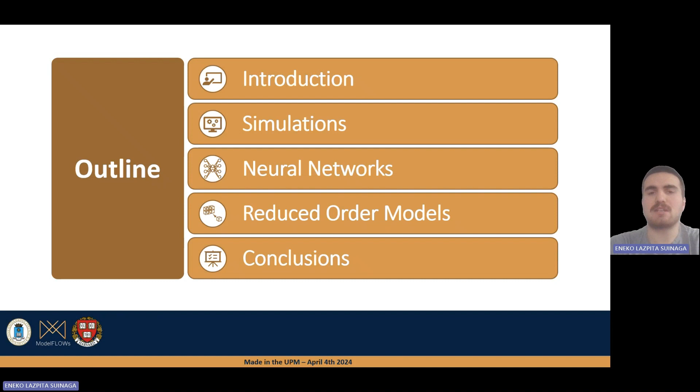So, as I said, I'm Lazpita, a PhD student, and my studies in the research field started in the bachelor's degree in aerospace engineering, where I had some interest in fluid dynamics, computer science, mathematics. So I made a project in the department of mathematics about pattern analysis in urban flows. This was part of a collaboration of the UPM with the KTH and the Universidad Politécnica de Valencia. And from this study, we published a couple of articles.

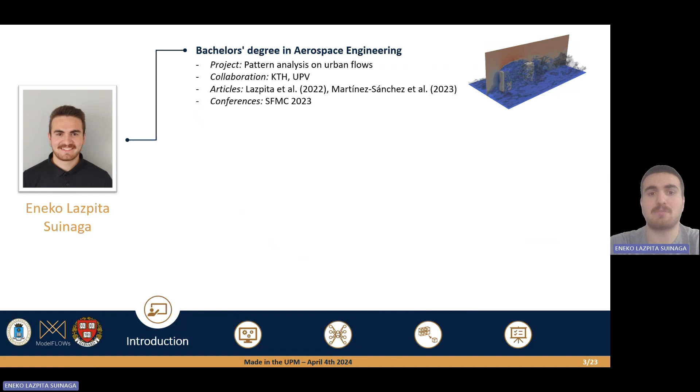Then I did my master's degree in industrial mathematics, pursuing a little bit more this world of modeling flows and other physical phenomena, but also attached to this kind of mathematics or computer science field. And here I did a project of flow control on turbulent channel flow, and both of these topics I've already explained to you in previous videos. We also have published an article about this.

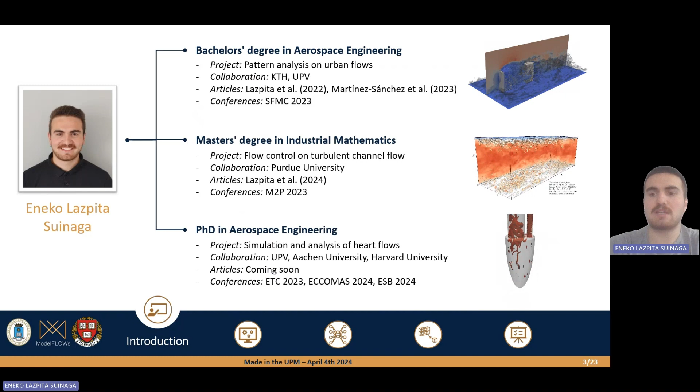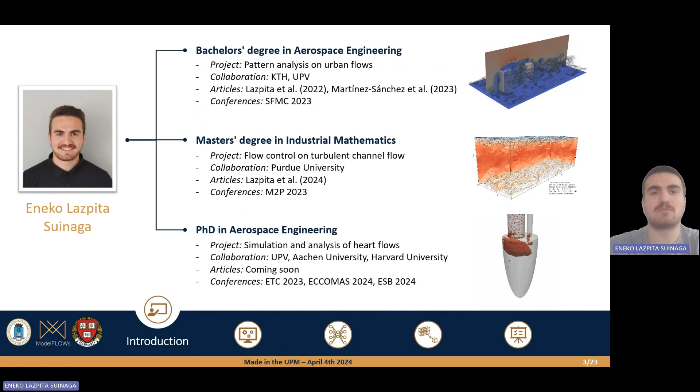And lastly, my PhD thesis, also in aerospace engineering, where I'm basically trying to simulate and analyze heart flow dynamics through CFD and neural networks. This is being done in collaboration with the UPV, the Aachen University, and also now Harvard University as part of my stay. We are also writing a couple of articles about this work.

So before going deeper, as this presentation was part of a public presentation, I wanted to first give some key ideas about what are the databases I want to extract and why an aerospace engineer is working with cardiac flows, with cardiology. Basically, a fluid can be something liquid or something gas. So it can be air, water, or in the case of this study, blood. Also, these fluids can be modeled using the Navier-Stokes equations, and with this we can extract the mechanics of these fluids.

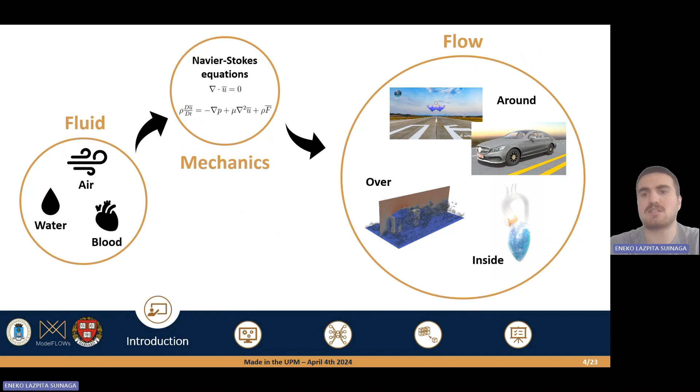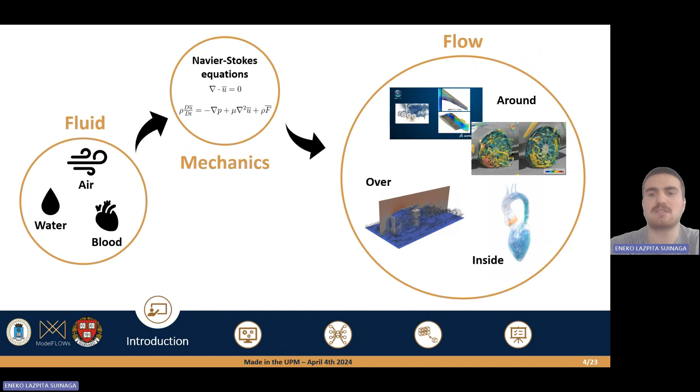This way we can model and obtain the flow over something, such as the urban flows, around something such as cars, airplanes, wings, etc. Or what we are interested in the current study, inside something such as a pipe flow, or in our case, a cardiac flow inside a heart. So now we know why an aerospace engineer is interested in cardiac flows, since the modeling, the equations, and everything are the same.

Why is it so important to study these cardiac flows? Well, there is a great burden in cardiac diseases, which are the leading cause of death regarding diseases, as you can see here on this graph. And 17.9 million lives were prematurely cut short in 2019 alone due to these cardiovascular diseases.

Right now, the state of the art is to diagnose and treat the aftermath of these cardiovascular events or diseases. It means that once it develops, we can treat it. But what we want to obtain is a tool that can identify these diseases before they even develop, and therefore can give a previous treatment or solution.

So for that, I'm part of a project called the DigitHeart project, which is composed of different people, such as professors, PhD and postdoc students, and also doctors. In this project, we want to create a tool, a software, where we can introduce patient MRI data or echocardiogram data, medical data we obtain from the patients thanks to the doctors, and it can classify it as a healthy or an unhealthy heart.

And in case it's not healthy, tell us which kind of disease it can have, such as diabetes, obesity, myocardial infarction, whatever. Then also how this disease is going to evolve in time, so when will be the outcome time, when will be the cardiac arrest or whatever. And finally, some kind of pattern identification that will help this classification and prediction, and also understand better what's happening inside a healthy heart or a diseased heart.

And well, inside this project is my PhD thesis. The aim of my PhD thesis, my project, is to enforce this kind of neural network that classifies and predicts cardiac diseases using simulation data. So for that, I am following this kind of scheme to obtain good databases in an efficient way.

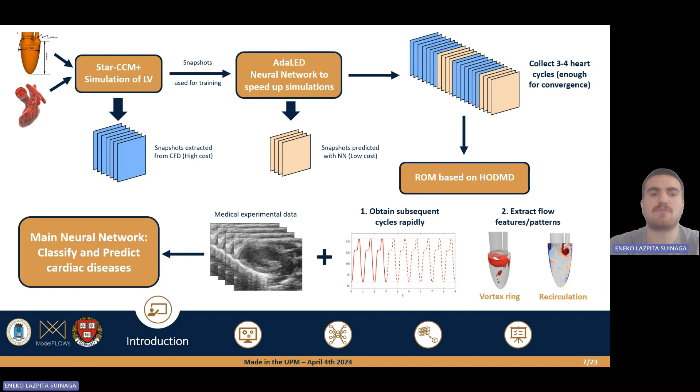So, as I said, the first part of my thesis are the simulations, which I've been performing until now, and I continue working on them. But there are different things to take into account in these flows, since they are really difficult and complex to model. First would be the geometry. We first started using ideal geometries, which are constructed for reference, and we use them for validation, to see how we create these vortices, if our codes are all right compared with literature, etc. And then we can also apply them to patient-specific geometries extracted from medical data we were provided.

The second thing would be the movement of the heart. Of course, you know that the heart is pumping blood, so the heart is moving. First, we tried to use rigid walls. They were not enough; we didn't obtain good vortical structures. So now we're using moving walls where the ventricle walls are moving, as you can see in the video. And finally, for the boundary conditions, such as the inlet and outlet, we can use different kinds of conditions, such as free flow, but the ones we are using right now are fixed, where we specify the inlet velocity and the outlet flow rate using medical data.

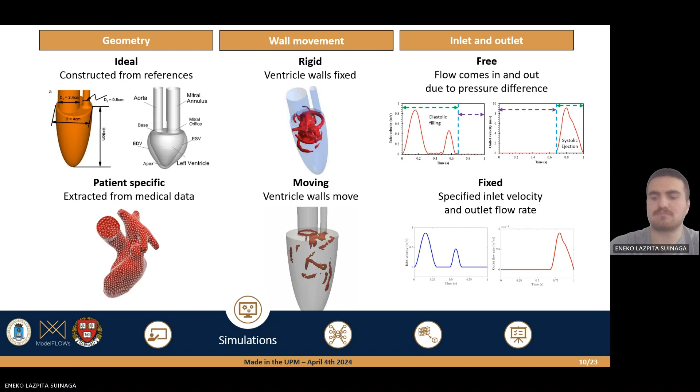So the results of these simulations are the ones you can see on the screen. Starting from the left, we see the Q-criterion, which can catch vortical structures. And what you can see in the video is the first formation of the ring, then the tilting, and the creation of the second smaller ring when we are in the second part of the diastole, which is the A wave, and finally the outflow.

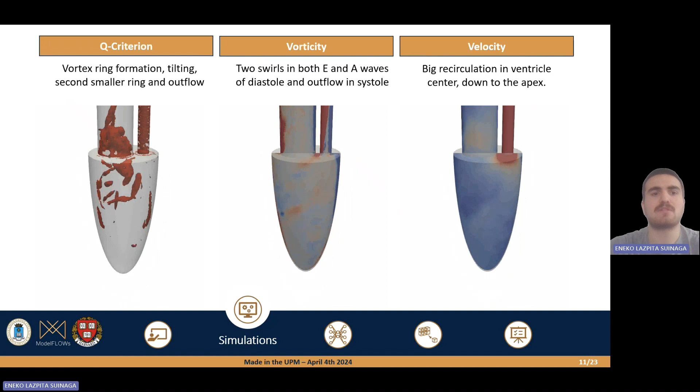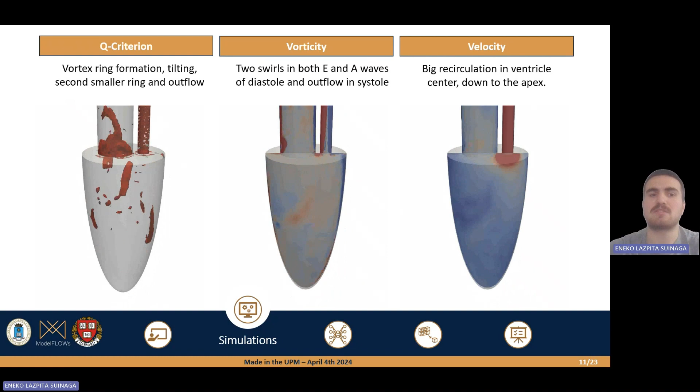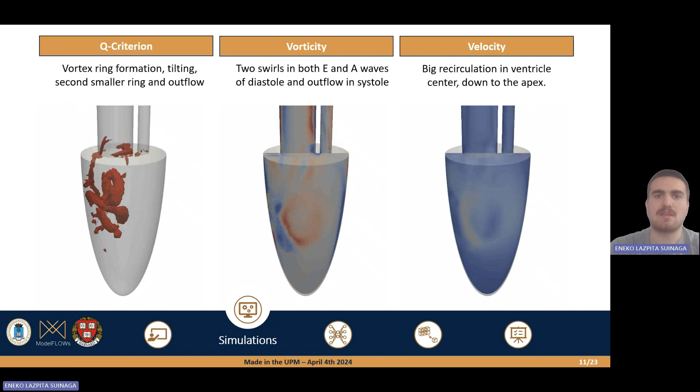We can also see something similar in the vorticity plane, where we see swirls going through the ventricle, and then the outflow in the systole. And finally, in the velocity, we can also see this big recirculation that is created thanks to the vortex ring, this recirculation that goes down to the apex, and then we have the outflow. So we were able to obtain good databases, and now we want to speed up obtaining these snapshots, or databases.

So for that, as I said, I am currently working on this neural network to speed up the simulations. We extract from the simulations a data set, which you can see in the video I'm showing, where for now we are only studying the velocity magnitude. And we're going to use an autoencoder scheme to work in the latent space. So we have our data set, which is the video, for example. We encode it using the encoder, as its name says, to arrive at a latent space, which is a really reduced space with way less computational cost attached.

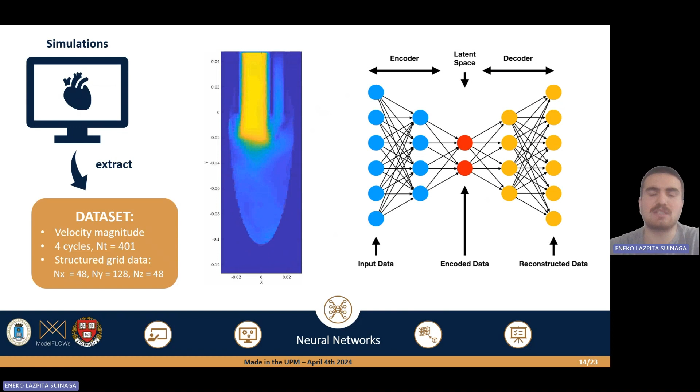And we are going to work there. We're going to do predictions there or whatever we need. And then we need a decoder to go back to the big space where we again have the reconstructed data. So with this idea in mind, we constructed an autoencoder from one reference, which, using a mix of convolutional layers and dense layers, can downsample the space to a really small latent dimension, where we can work in a really reduced dimension.

So in the end, the general idea of this neural network is to take a snapshot, encode it to latent space, predict in this space using some kind of architecture which we're working on, and then decode back the predicted states. And this way, we would be able to use this kind of neural network for prediction. Of course, for the training, we need to compute the loss we have in these kind of predictions, but afterwards, we will use this to just obtain these predictions.

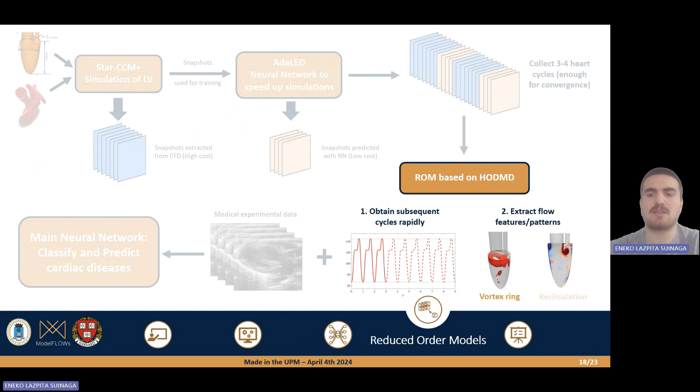And finally, the last part of my thesis will be the reduced order models, where we're going to use some HODMD or modal decomposition based algorithms. But first, let me again give some guidance through these reduced order models. In the end, what we want to achieve with these reduced order models is practically the same as in the autoencoder. We have our big space in the top images. We have one snapshot and the correlation between the different snapshots, the correlation in time, right?

And what we want to obtain with these reduced order models is to go to a more reduced space where we can represent our database in a reduced manner, and not only one snapshot but also the correlation between the different snapshots. So this is pretty similar to what we're trying to do with the autoencoders, but in this case using modal decomposition. And the advantages of this can be the cost reduction, since we can get rid of a big part of the dimensionality of the database. We can use it also for denoising.

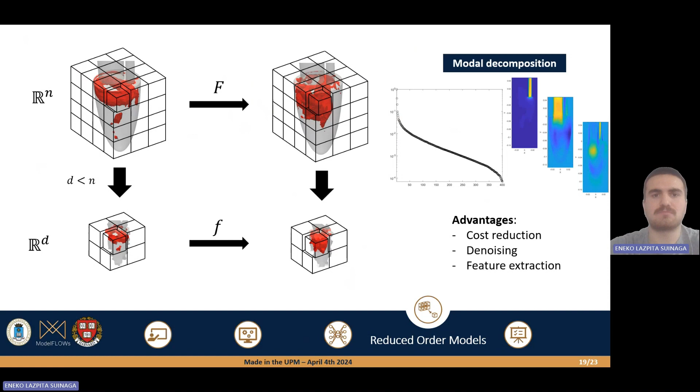And finally, for feature extraction. If we analyze, for example using singular value decomposition, the most energetic mode, which is the mean flow, we can see that it is related with the outflow. But if we analyze further modes, we can see something related to the inlet, then something maybe with the recirculation. So we can use it also for this kind of feature extraction. And why is this pattern identification and feature extraction so important? Well, in this slide, I want to convince you of that, since, as I've been repeating quite a lot,

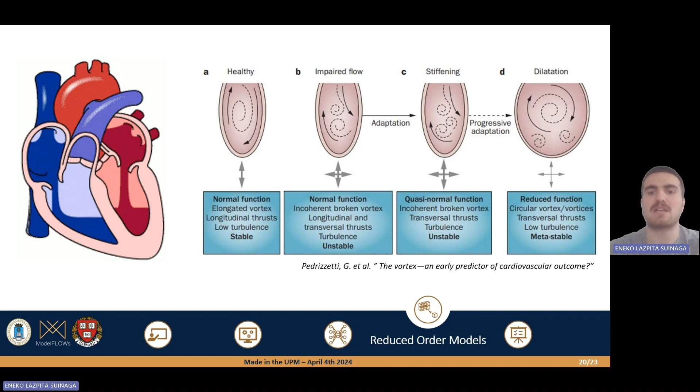So what many studies say is that the changes because of a diseased heart appear first in the flow and then in the physical form. So if we are able to identify these changes in the flow, we will also be helping in classifying and predicting these heart diseases.

So the conclusions are basically what I've been saying in this whole presentation. Our DigitHeart project is trying to develop tools that can help us treat heart diseases preventively. For this, my PhD thesis is centered on obtaining simulation data of these cardiac flows to help improve the accuracy of this neural network for classifying and prediction. For that, we also need the help of these neural networks, which can speed up the simulations, since some of them can have a really high computational cost.

And finally, we can also do pattern analysis that can make us better understand the underlying physics and also detect features that are maybe hidden to our eyes and can help us identify and classify some possible heart diseases.